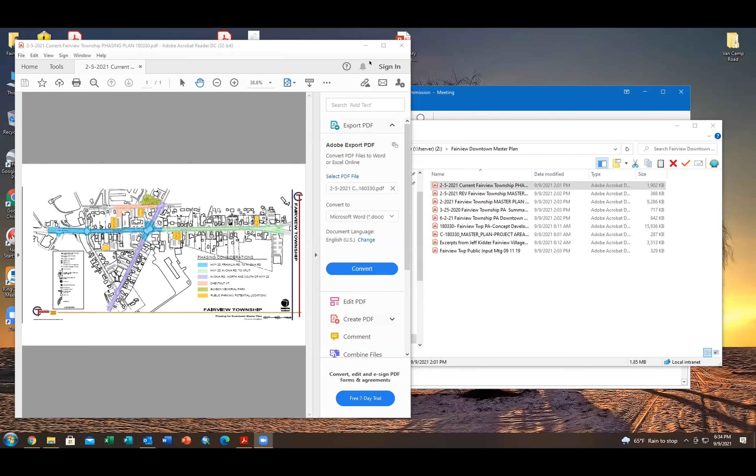Okay, this is our phase plan for our downtown. Our downtown consists of basically Route 20 and 98. On the west end, it goes to basically Franklin Road, kind of like where Bonnell's Collision Center is. And it goes east all the way through the town to where Route 20 kind of winds with Old Ridge Road, right at about the Chico's Travelers Restaurant area.

That is our downtown. The phasing is to be done in sections. The first one, the blue, goes from Franklin Road to just about the center of town. The second phase will be from the center of town east to where I just spoke about, Chico's. And the third phase basically goes from the post office south all the way to Water Street in that area. So in these three phases, you can see the blue, the green, and the purple. Those are our main phases of this downtown plan.

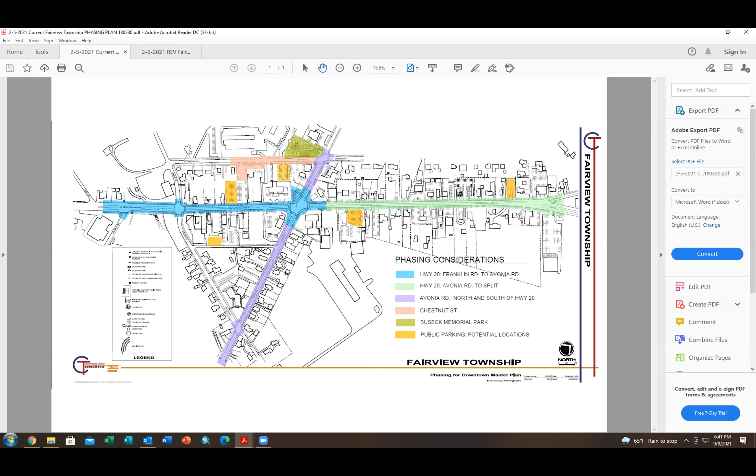And then I'm going to go to a series of pictures, number 3, which will be our concept plan. That's our master plan. And then if you go to the concept plan. So this is starting on the far west side. This is our concept of what we're trying to achieve with kind of a gateway entranceway into Fairview, and a gateway exit entranceway on the other end of Fairview. So this would be at one end where you enter into Fairview.

And then we're going to switch the picture and go to the next one. And this is the old-time Fairview, where it was years ago. Okay, and we'll go to another one.

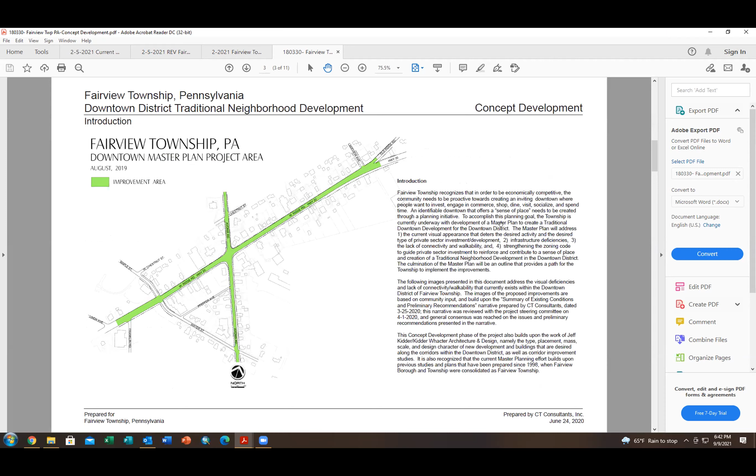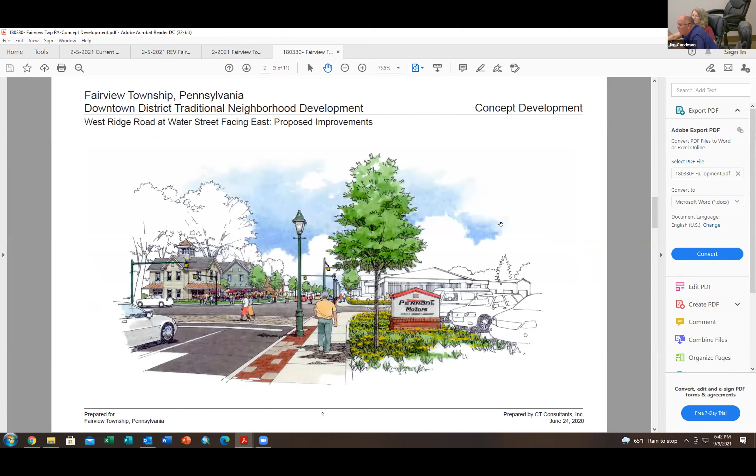Stay in phase 1, hang on one second. There you go. Now that picture is the same one as the Pennant Motors one. You can see the sign on the right. This is actually what we got today. And if you will go back one picture, Judy, that's what we want to achieve. Okay, so that's the far west end.

And we'll go farther, this is kind of the north end of the township. As you know, we have Hurdle and Brown, and on the right-hand side is the post office. And then we'll go to the concept plan of what we expect it to look like someday, with crosswalks and widening of utilities. And you can see we got some light poles with flags on them that say Fairview, PA.

This is, as you look at it, kind of from the downtown looking to the west end, or east end looking to the west. You can see Sabo's Pizza there. This is kind of where Old Ridge Road abuts Route 20. You can see our old laundromat that was changed into a floral shop on the left side. And then our concept plan for here.

This is the way that we see this in change. So we're proposing, as you can see, the building on the left, the tall building, architecturally we're trying to get back to the traditional design within the downtown, allowing for some outdoor dining, allowing for old design structures to make it appeal like the downtown used to be. That's part of this traditional neighborhood district.

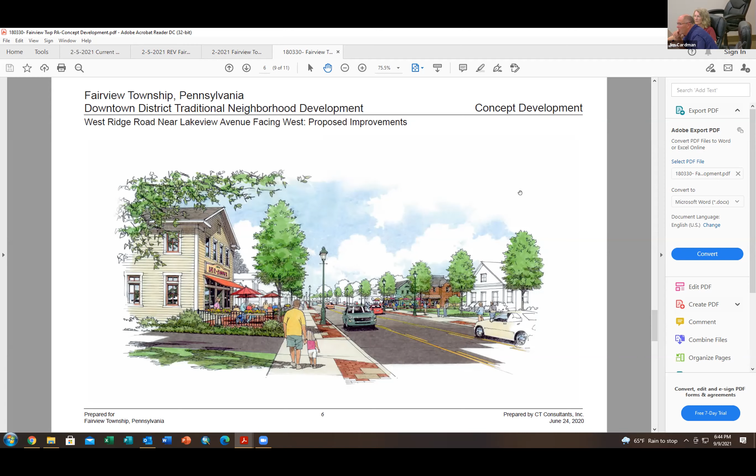Okay, so as you can see, this is right in the middle of town now, and you got our Burger King on the left and our Country Fair on the right, looking to the north. And then we can go to the concept plan of what we see that to look like in the future. So that's where we are with it, that's our plan. It's going to take a lot of work, but we have to start somewhere if we want to revitalize this downtown.

So what I'm asking for from this committee is if you would honor us to accept or be able to direct some type of a recommendation letter that we can use for grants, saying that the Erie County Planning Commission has been educated or displayed what our downtown plan is. And if you would recommend it, write a letter of recommendation that we can use for grant applications in the future.

Well, that's quite a project, Jim. That's really practically ripping the whole downtown out and rebuilding it. So you've got a really long project.

It's going to take years, and we know that. And Chuck, to be honest with you, we know that's not going to change fast. But people don't want to come and invest in our downtown if there's not a plan for it. I mean, somebody isn't going to want to come in and put a little coffee shop in the downtown if they don't know that our pedestrian access, our sidewalks, our crosswalks, street trees, they don't want to invest unless they know there's a plan for that. How long do you think it'll take for this project to get done or completed? My guess is 20 years or more. We expect the first phase to get going within the next 5.

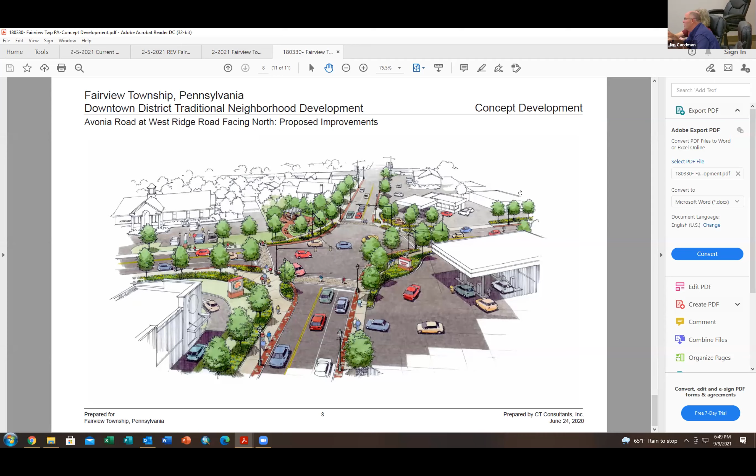If you can go to picture number 3, Judy, I want to show you this. Within this master plan, go back up north. Right where Lakeview Avenue is, you can see that parking area on the north side just before Lakeview — I don't know if you can see her circling that. We just purchased that property, where the computer store is. Our plan consists of adding additional public parking lots within the downtown area to access the new sidewalks.

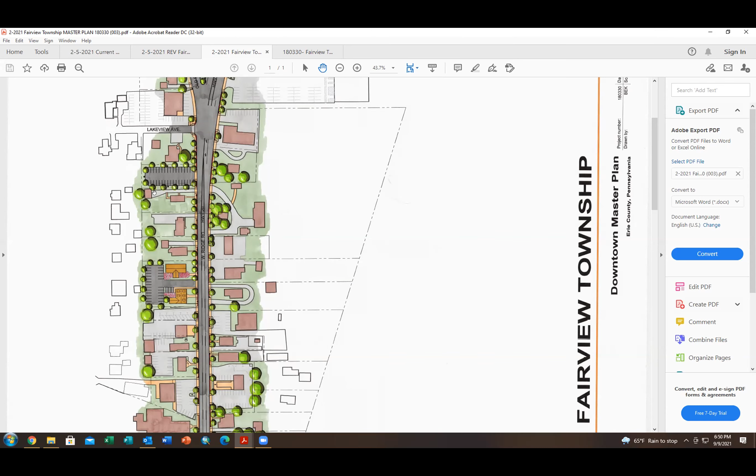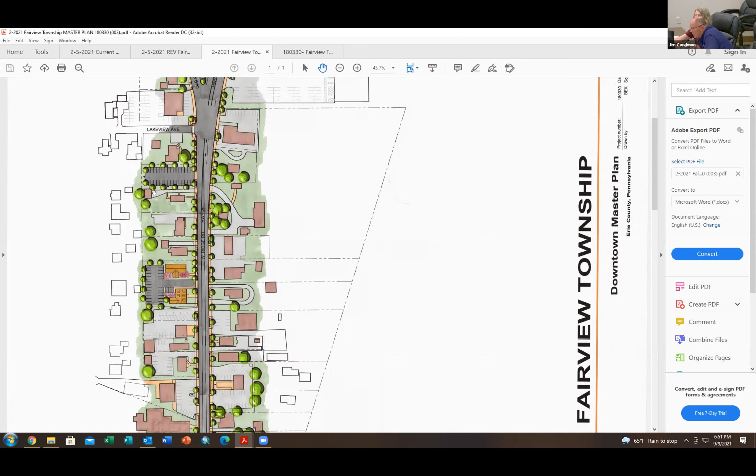So I guess that's the way we want to address the parking. Jim, when I mentioned on-street parking, while it's an advantage to local businesses and provides parking for vehicles, the primary reason I mentioned it is because it slows traffic. That's why our thought process is to allow for a kind of gateway in and out of town. We only have so much right of way to work with on Route 20, and to have transportation access at two major intersections with turn lanes, we just don't have enough room to do that safely.

So our thought process was to form a kind of gateway as you're coming into town — you know you're coming into town — and part of our transportation plan is to change the speed limit within the downtown to slow traffic down.

Well, I just want to say that everything I'm reading and experiencing myself is that changing the speed limit is like a Band-Aid solution, or even having traffic cameras. The things you want to do to change drivers' behavior is to change the design of the space so that all the physical reminders force traffic to slow down. That's why on-street parking is so effective — it automatically signals you're not on a highway anymore, you're in a downtown. My thought is, if you're talking about a 20-year plan and redoing the lighting and sewers, now's the time to talk about this.

Think about creating enough space for on-street parking and a bike lane. If you're really trying to create a walkable urban downtown — I know you've done a lot of work already, and I'm not sure who's been involved with the planning — but having bike paths, on-street parking, and street trees are all key components for making it easy for people to slow down as they're driving, because the signals in the environment are saying slow down.

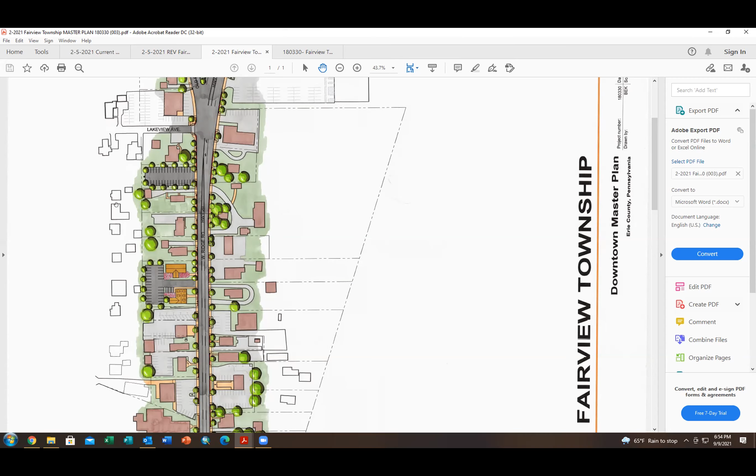So just to clarify, street trees are actually between the pedestrian on the sidewalk and the street. The images I've seen, for the most part that I can recall, are showing trees with the people walking on the sidewalk in front of the trees that I saw.

And the other thing is that Bill Pettit is a really smart guy, but he's a traffic engineer, and so his guidance is to prioritize vehicular traffic. That's what he's done his entire career. He's a nice person, but not someone I would turn to for expertise in urban planning.

So anyway, we aren't using Bill— hey, just for Jim. Hey, Jim. Yep. If there's an emergency on 90 and the big trucks and everything start coming down through your town, is there going to be enough room if they put trees and all this other stuff up for them to come in? Because that's a traffic jam when they start coming down.

As you can see, Chuck, the trees are on the outside of the sidewalk in this concept plan picture. The reason is it's not real hard to add an easement for street trees to people's property because we're dealing with individual property owners. But it's a lot more difficult to put those trees between the street and the sidewalk. So the plan was, as we already have an easement on 98 for trees that we added when we put our new sewer line in, to continue with that concept.

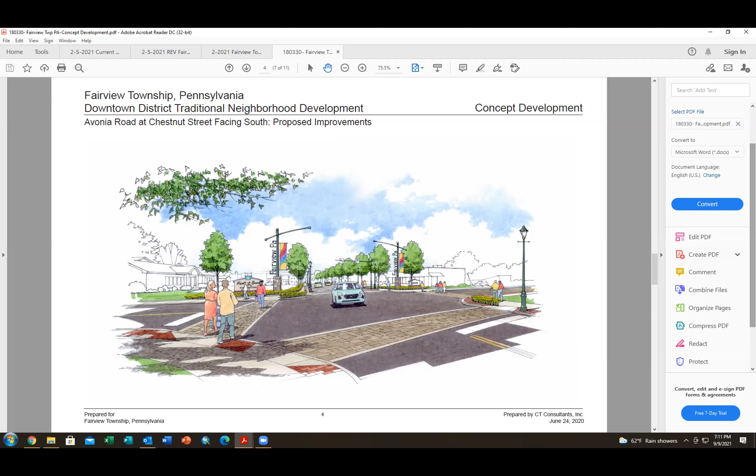Would you mind stopping your screen share? Sure, hang on. I'm realizing I can do it really quick while we talk. I didn't pull up the meeting dates, but we can move into that and I can see if I can grab it real quick.

Charles, do you want to move to new business? Are we all done with old business? Yes, let's move on to new business about the meeting dates.

I see you got the 2022 meeting dates. Is there a change in the bylaws for that? No, so—do we not have to go by the bylaws on something like that? Yeah, so if you give me a second I'll pull this up, even though you won't necessarily be able to see it, I'll pull it up for everyone else. I know you have it in front of you, and just in case others do not, I wanted to grab that and share it on the screen here real quick, and then I can talk about it. Just give me a second—it's really hard to pull things, share things, and talk all at the same time. It's like patting your head and rubbing your tummy.